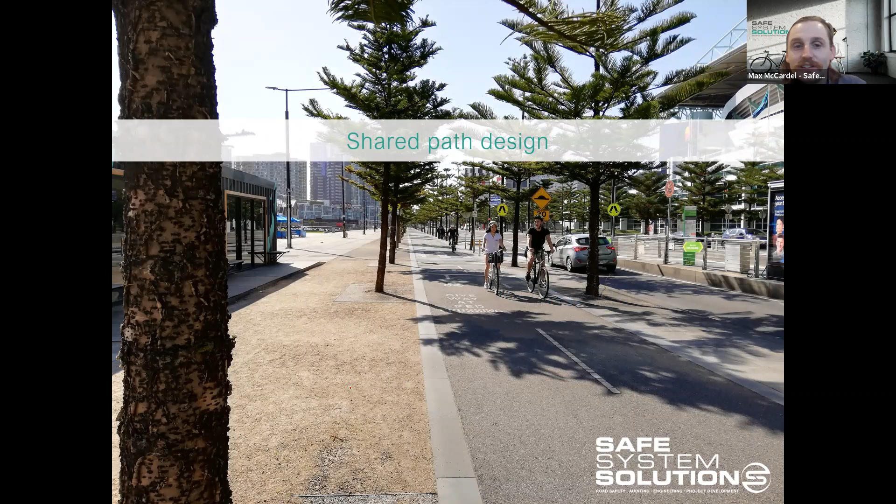I'll get stuck straight into it. We actually have this off-road facility here that runs along an esplanade, and it's a little bit difficult to see, but this is exclusively for cyclists.

Pedestrians walk closer to the esplanade, shifted away, and bikes are given sole priority within this space. This is a really good example for high volumes of either pedestrians or cyclists, because bringing both users into the same space at high volumes risks cyclists weaving in and out, creating uncomfortable tension between path users, and increasing the risk of collisions with other cyclists or path users. So with significant volumes of both peds and cyclists, it's good practice to separate those two and build separate facilities.

In a perfect world that's exactly how this environment would work, but generally pedestrians will pause and wait on the bicycle path, and similarly cyclists might want to ride along the esplanade. So it's not perfectly constraining those two users to use those facilities, but the intention is to get higher moving cyclists using this part of the network, and pedestrians who like to meander over there.

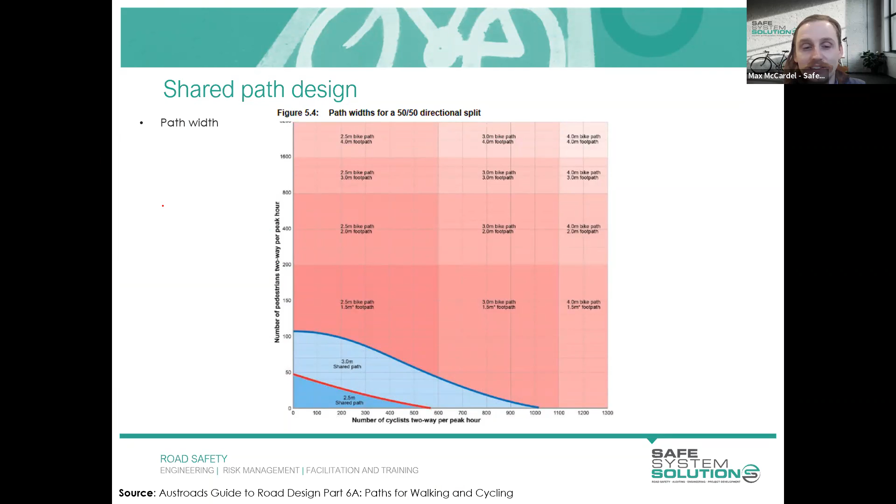This works into this graph here. For those who may have seen this, it's from the Austroads Guide to Road Design, Part 6A, Paths for Walking and Cycling. You'll notice that source comes up frequently throughout the slides, just in case you want to reference it yourself - it's a quick link to find exactly where this graph has come from.

What this is saying, if we look along the x-axis, is the number of cyclists two-way per peak hour - a very long way of saying how many cyclists you have within this area. Similarly, the y-axis is how many pedestrians you have within the area.

The main takeaway from this figure is, as we increase both in the X and the Y into this category in the top right corner, you'll see it's actually recommending a 4-meter bike path and a 4-meter footpath. So with really high volumes of both users, it's suggesting a 4-meter wide bike path and a 4-meter wide footpath - not a shared path, because the numbers are just too high.

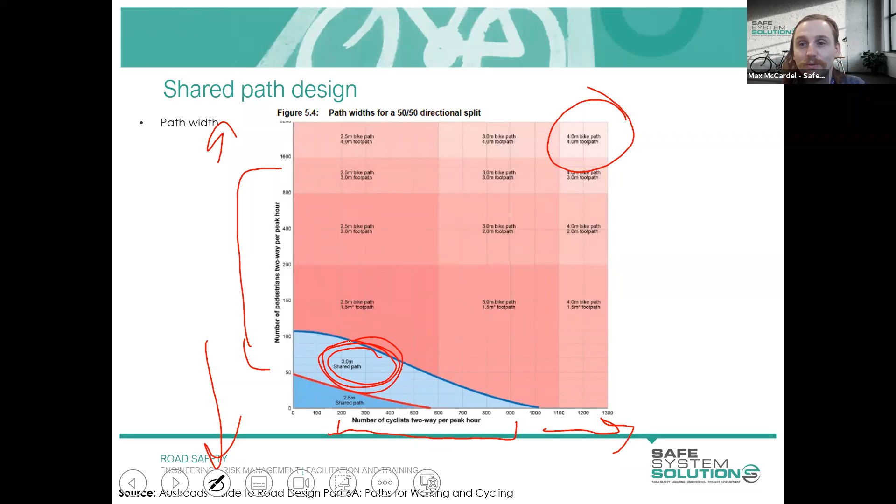Regularly, however, we are working within this 3-meter shared path cross section. A 3-meter shared path is incredibly common and typically what's designed for. But if you're working within CBD environments or high cycling corridor use environments - strategic cycling corridors - you may benefit from thinking about separating cyclists and pedestrians instead of providing a shared path.

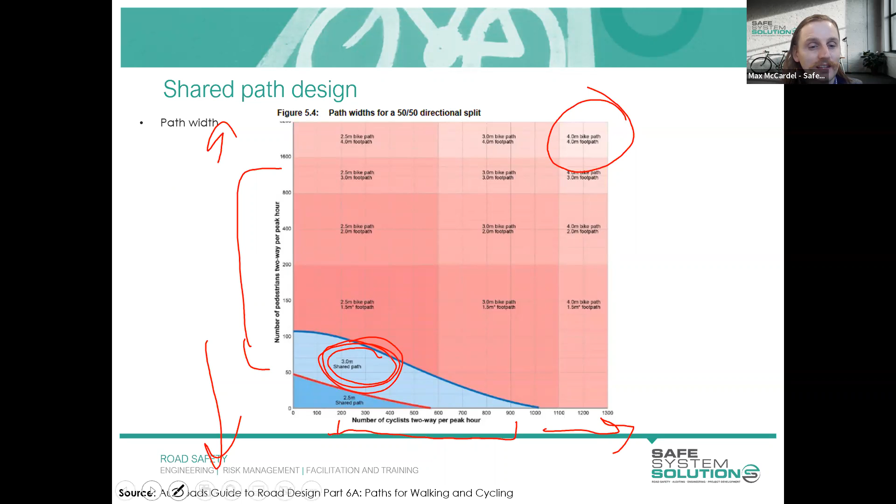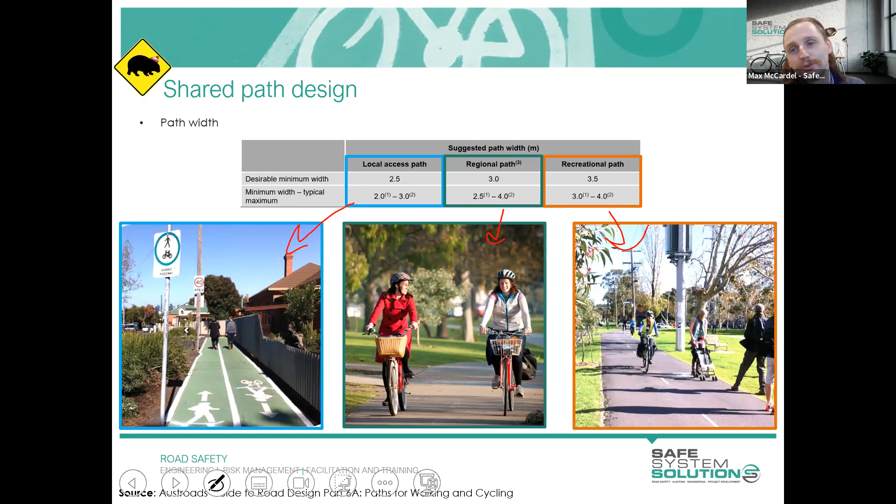Another means which helps define the cross-sectional width of our paths is also provided within the Austroads Guide to Road Design Part 6A. It gives very brief descriptions of different types of paths: a local access path, a regional path, a recreational path. There are brief descriptions like in the glossary of the Austroads guide, but it's fairly open to interpretation - there aren't metrics which would clearly define what constitutes local access, regional, or recreational, so there's a little bit of cloudiness on exactly how you'd apply this.

All I'd say is if we look at the local access path on the left here, this roughly 2 meter wide path is basically a footpath. It's not really wide enough to cater for cyclists in either direction - as you can see, two people walking side by side leave nowhere for a cyclist to safely pass; they'd best have to wait until it goes to single file. So generally we don't like to head towards the lowest of those minimum widths - we like to start at the upper boundary and work towards providing a project that can fit that.

Ken: Some good chat coming in already, just around clarifying what will be covered. The question, though, related to this one you're just talking about: does a less than 3 meter wide shared path increase the risk of a head-on collision?

Yes, I would suggest it would. As soon as you start narrowing things, particularly if there are sightline issues, you're increasing the risk of a path user straying into the other lane and potentially colliding with others. Also associated with that is the runoff path crash risk, so that shouldn't be forgotten either.

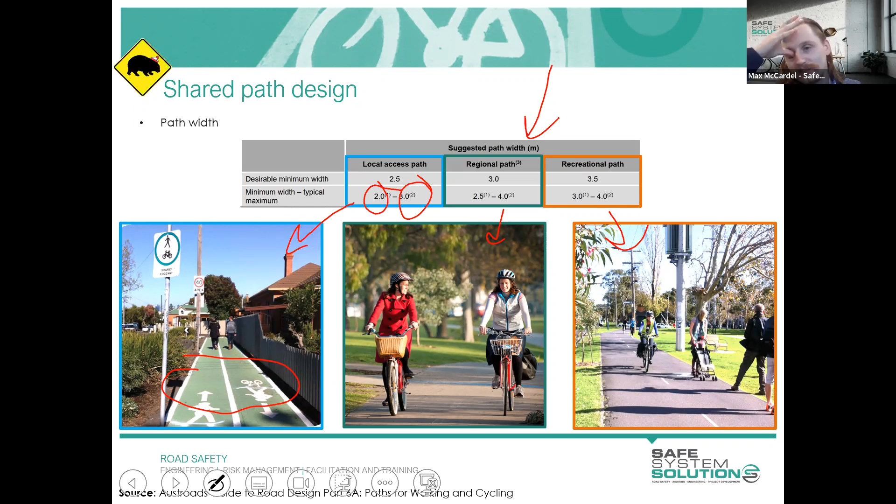So the next category is the regional path, broadly characterized by medium to higher speeds. It will have some degree of commuter cyclists, but not necessarily only used for that purpose. Recreational paths, on the other hand, are expected to have adjacent land use like parkland or playgrounds, indicating high levels of extreme or vulnerable road users, the very young and the very old, people with prams and similar situations. These categories are quite broadly defined, there's no classification network showing exactly what each type looks like.

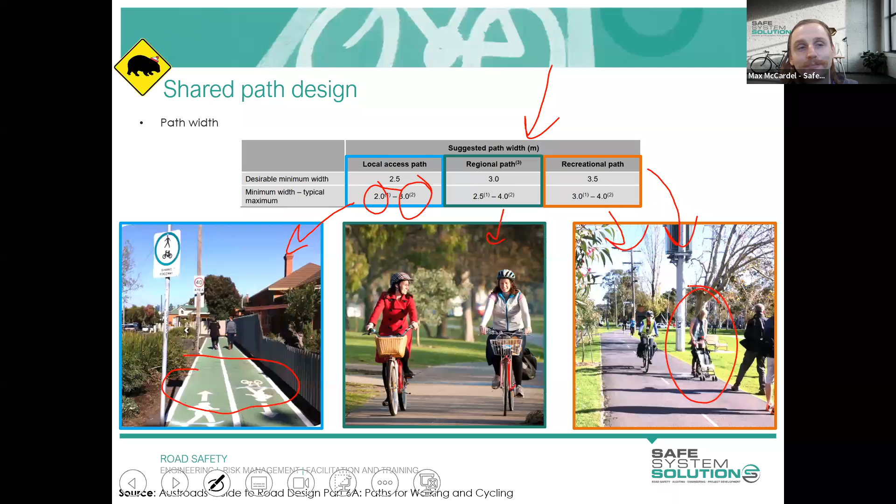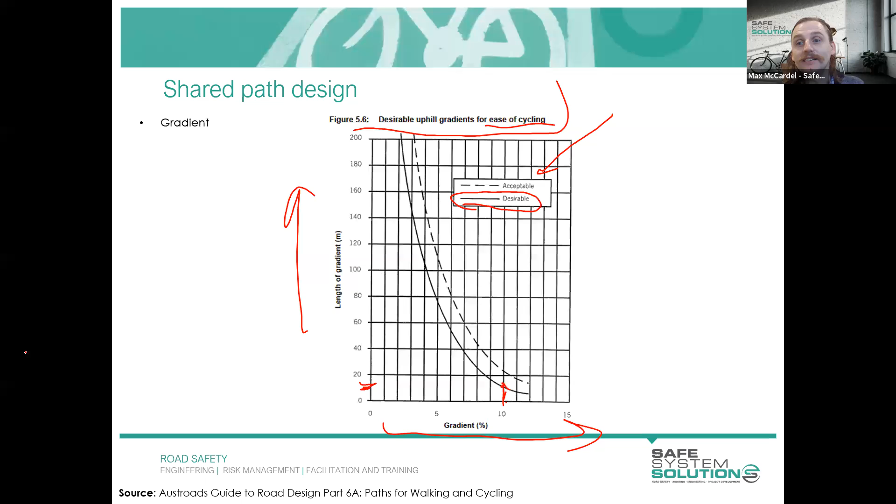Just want to look at what this figure is saying and its importance. Along the x-axis we have our gradient, the higher the gradient, the steeper the hill or incline. Along the y-axis is our length of gradient. Looking at a 10% gradient, which is very steep, even as a pedestrian walking you'd notice it. For a desirable outcome for cyclists, or ease of cycling, you should keep that to a maximum of 10 meters. In other words, if it's really steep, it should be for a really short amount of time or space. There's also a caveat of an acceptable range, like an extended design domain for those in the technical realm. Don't worry too much if you're not in the design space, it's just about making it easy for cyclists to feel like they're in an environment that suits their abilities.

Ken, a couple of quick ones. One was on the line marking.

When do you apply line marking for different path widths? Is it a bit like a road where there's sort of minimum widths and you hit certain line marking? Do you know that? Yeah, it's a really good question.

Thank you, Sam. It's done differently in every jurisdiction. There's no statewide or national guidance which would suggest at this width it should look like this or like this. Even along the same shared path, you may have discrepancies in the way the line marking is applied. So unfortunately, at this point in time, there's not one consistent treatment.

And just for those curious what this is talking about, on the shared path, sometimes it's just the edge line that's been applied, and that's about it. Other times you actually get the dividing strip to separate the two traffic streams, similar to a carriageway. But there's no metrics or anything out there that would suggest this is exactly when you should be applying one or the other.

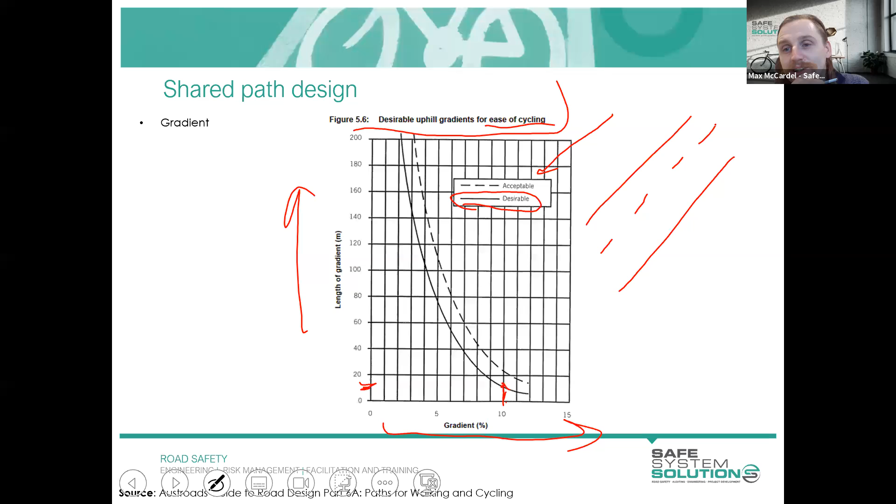Other times it's just the bicycle symbol and the pedestrian symbol, and that's it. But I'd be interested if anybody in the group has a preferred way of doing that, or their preferred guidance - share that with everybody. And Michael's asking for a photo of a 10% gradient path, which I don't think you've got one.

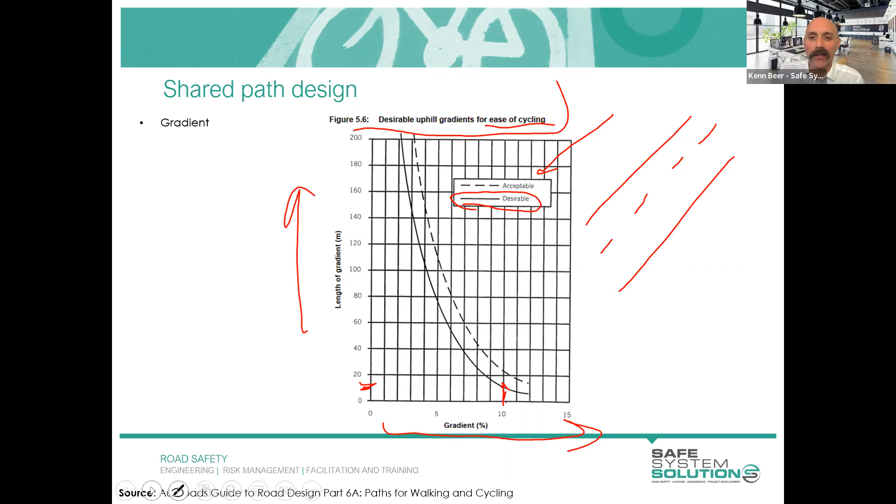Let's have a look at the next slide. Oh yeah, this one is quite steep. I couldn't quite confirm, but this is for a pedestrian overpass that crosses over a highway here - and I should say pedestrian and cyclist overpass, because it's a shared path connection.

And before I spoke about the gradient uphill, I'd like to throw out a question to the group. Are there any issues with gradients downhill for cyclists? So imagine you're the cyclist, you've got your bike here and you're heading down in this direction here. Can anyone think of anything within this particular scenario that could be of concern, or perhaps a risk that you might note if you were auditing this design?

Okay good, let's see if people want to type a few concerns that they might have. And while people pop those in, Michael's asked why the two parallel running handrails - is that an attempt at a bicycle friendly sort of system there? I would suggest, yeah.

So it looks like one of these rails would be just typical for pedestrians - it's at a little bit of a lower height, so something for them to grab onto. And the higher rail is something we refer to as cycle-friendly fencing, which we have a slide later on in this presentation to cover. But I'd suggest that's the reason they've got these two different rails. Not a common feature though - I can't say I see that regularly.

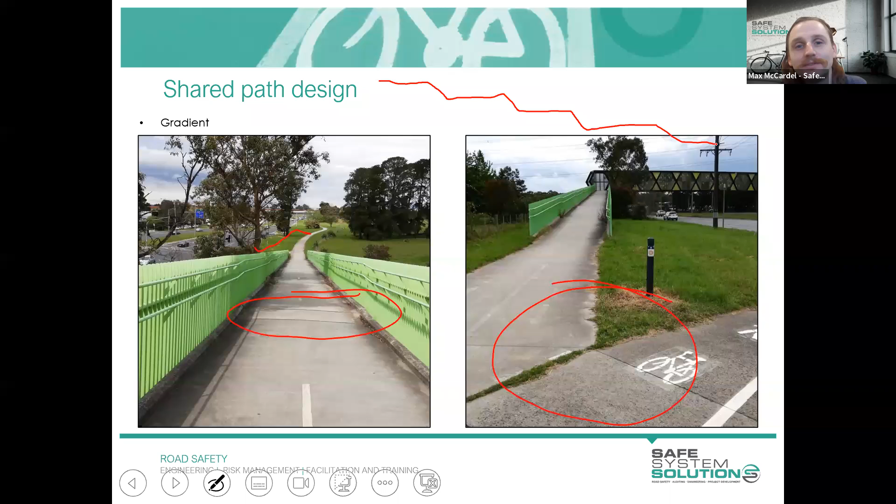My understanding, and happy to be corrected, is how this would look in plan view - it's not a very good drawing, I'll try that one again. Sorry about that. You'd have a section that goes downhill, then a flat section, then a section that goes downhill, flat section, downhill, and it continues in this fashion all the way along.

My understanding is that's for people in wheelchairs, to give them spaces within those landing sections to pause, both going uphill and downhill, so they don't collect too much speed going downhill and potentially lose control. As far as I'm aware, this is actually a common design feature in these pedestrian overpasses.

Toby has a copy of AS 1428 next to his bed and reads it every night, and he's putting in some wonderful information that ramp landings are required at certain intervals, and also that double handrails can be a requirement for access for people with disabilities.

Question around this site and why we're looking at it - is it a particular crash site or a particular site of risk, or is it just an example of where we like the thinking of potential risks and not waiting for crashes to happen before reacting?

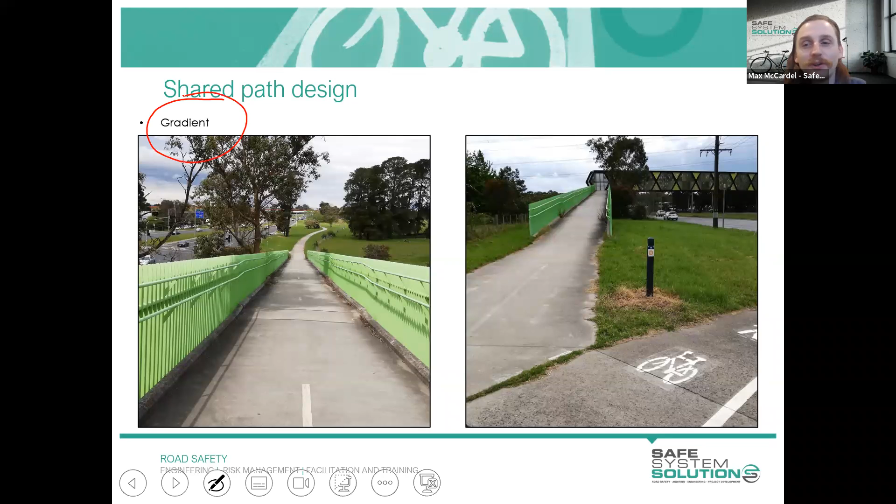Yes, most likely the latter is the reason for this inclusion. Also, the Austroads guide focuses on the uphill gradient - that's where you get your figure from, that's generally what the designs are catered for. They're worried about cyclists going uphill.

The purpose of this slide is, well, cyclists are also likely traveling in the opposite direction. What's at the bottom of that downhill? Are there hazards there? Are there path interactions? Thinking about those things as well, it's trying to expand on what's written in the Austroads guide.

There's a bit of discussion around whether those ramp landing points could be a hazard for a rider as they come down. You can feel it as a cyclist, but I wouldn't suggest it's as big a risk as a hazard - they're generally designed in a manner that reduces any instability issues. It's a good question though.

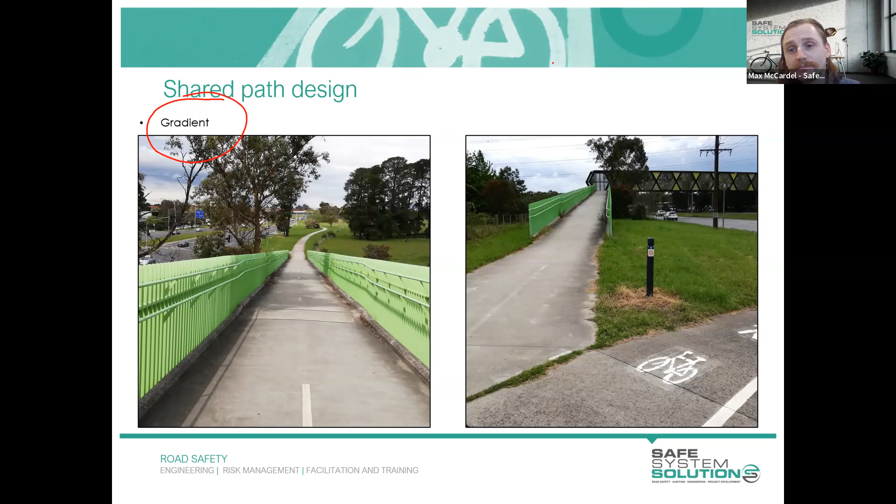Yeah, let's keep ticking along. So let's have a look at what our operating width or cyclist envelope is. Similar to general traffic and heavy vehicles who have an envelope, cyclists also have an envelope. The operating width of a bicycle and rider is generally taken as 1 meter.

There's a little caveat in that if cyclists are going uphill, they kind of go left and right to gain momentum, which would bring that operating width a little wider. Austroads is actually talking about increasing that to 1.5 meters, which could have a follow-on effect to other things within the design world. But at the moment it's taken as 1 meter, so we'll have to watch this space to see things change.

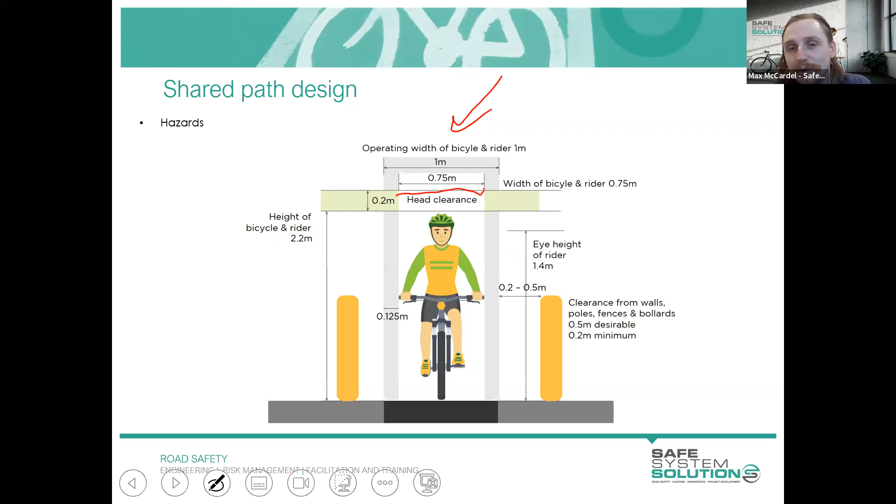What that's actually saying is the actual width of the handlebars of a typical bicycle is 750 mil, 0.75 meters, which means there's only 125 mil clearance from the bicycle to the end of that operating width - so there's not a lot of clearance there.

The most important aspect here is what we consider an appropriate offset from hazards for that operating width. 0.5 meter is the desirable, generally taken as the constant offset from where the shared path would end. There's a 0.2 minimum, but that would only apply if it's a smooth feature, like cycle-friendly fencing, which is okay to be within such a tight space of a cyclist because it's less of a hazard compared to snagging risks or a utility pole. The final point is the height of the bicycle and rider is about 2.2 meters and requires a head clearance of 0.2 meters.

So anyone doing any work within underpasses, or cyclists using culverts as a means to connect shared paths, that head clearance will certainly become very relevant to you.

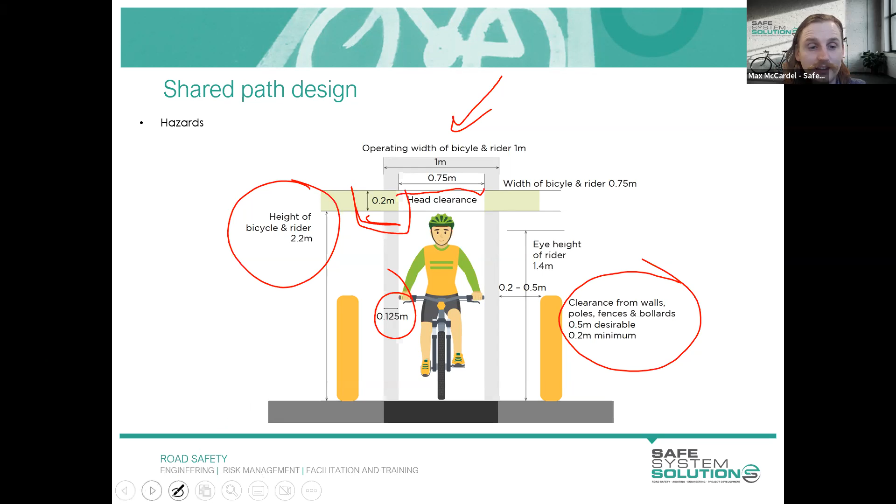Just another quick one around passing and overtaking clearances needed for other path users on a shared path. So thinking about what sort of spaces we might need for that.

I haven't seen any guidance that would particularly stipulate when to provide overtaking opportunities. To me, where it's useful to widen paths to allow for that is where you've got shared path connections. Similar to what you'd do at a rural intersection, say a T intersection, you might provide that little bit of extra width or build out the shoulder, so if a right-turning vehicle enters the minor leg, someone else can overpass them on the left and carry on. Similar design philosophy within the shared path space, but that's not written in guidance - it's more just a philosophy that's evolved over the years.

There's quite a bit of road design guidance theory, but those theories haven't yet translated to people making firm decisions around shared path design guidance and things like overtaking opportunities, overtaking lanes, and clearances required for that and the like.

Another question that's come in - there are many types of bicycles out there, so how do we get into this particular design guide bike? It's a very valid question. We're moving in a space where e-bikes are becoming more prominent - recumbent bicycles, tricycles, unicycles, lots of different ways to get around. This is just a means of identifying what a typical cyclist would look like in terms of geometries, similar to how we have a standardized car or standardized heavy vehicle. It's not a perfect illustration that's going to cater for all different types of cyclists, but it's trying to take a snapshot of what the average would look like.

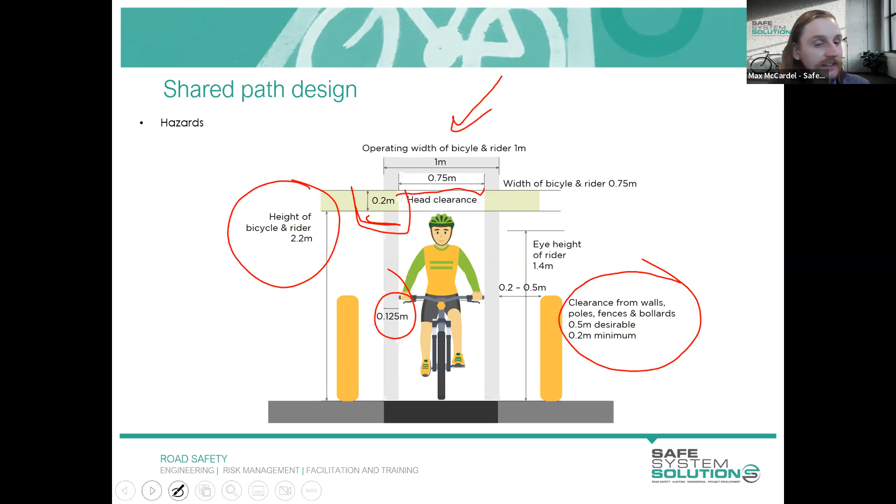I might carry on there, because there's still a few slides to get through. We've got some hazards here, very common hazards that are seen adjacent to shared paths, or in this case, within a shared path.

These kind of design features may look trivial or not seem like a big issue when you're looking at a design, but just having that sense check or audit completed by someone who is a cyclist or uses cycling facilities, or is experienced in this space, can help rectify these issues before they get built - like having a little bin shelter that's actually off the shared path as opposed to being constructed on it.

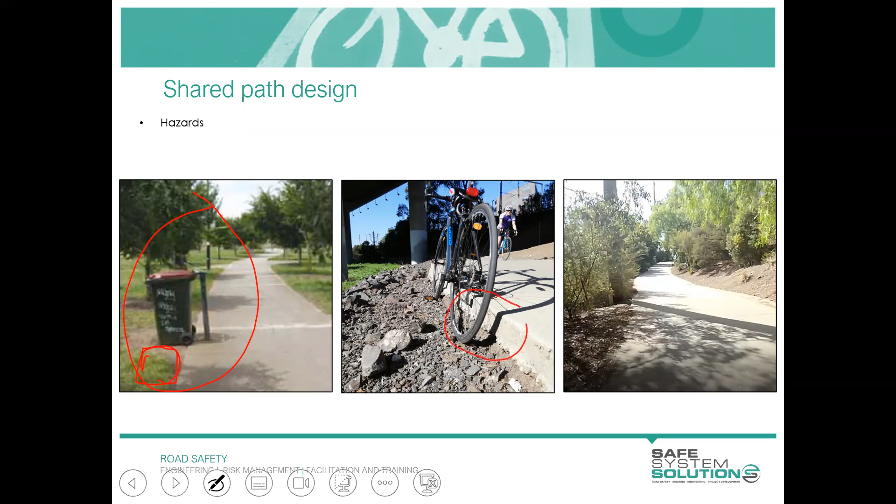This is an example of a concrete path that hasn't been backfilled and battered - the slope hasn't been battered. Likely this has to do with just the construction of this particular path. The solution is just building up all this rock backfill material and creating a nice smooth transition. If you were to come off your bike at this location, unless you had a mountain bike, you'd be very unlikely to get back onto the shared path.

Final little hazard here, it's just a utility pole that's very well hidden by the vegetation that's overgrown it, and the edge of the shared path is about here. So it hasn't met that 1/2 meter clearance I was talking about before. Basically, if you were riding along in this direction, it'd be possible for a handlebar to snag on that utility pole.

And it becomes more of a risk when you have lots of activity occurring on this side, or maybe there's a person walking a dog and the dog decides to walk along here, so you're forced to swerve and then you're colliding with the utility pole.

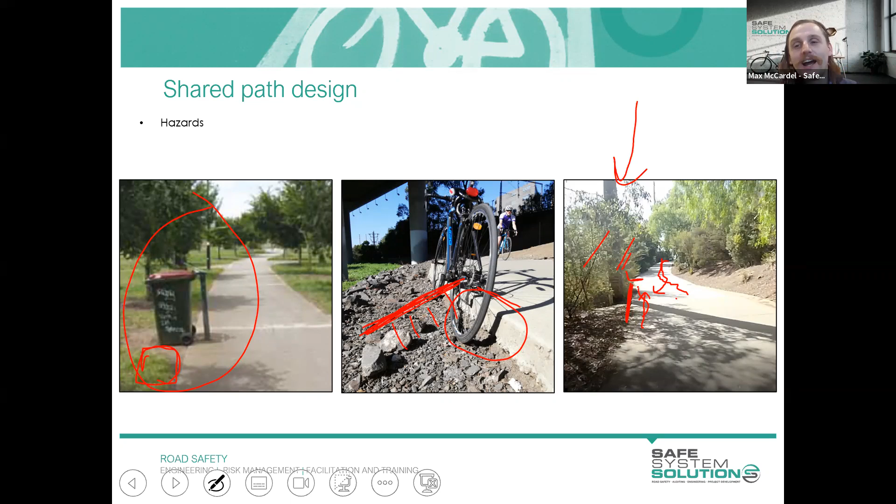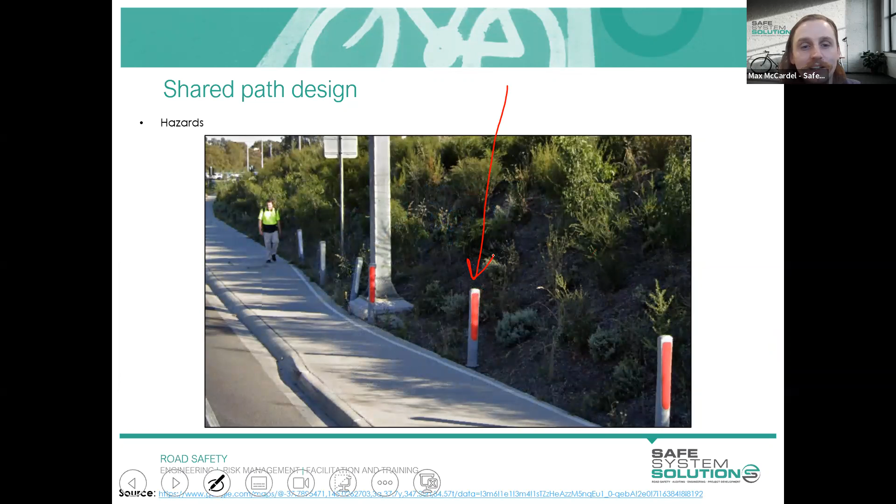So considering all these different hazards, what could be done within these situations to improve safety. An example of that final hazard, and what's been done in this particular environment, is installing these kind of paddles or flexible bollards, as they're called, just showing that the path narrows at this location due to this gantry foundation.

For those that haven't heard of a gantry, this is just like a base for a large sign that is shooting over the carriageway there.

So yeah, what they've done - I would suggest this is a post-construction audit - is noted that the shared path narrows, and providing these paddles here just to make it more conspicuous that there is a hazard in this area. This is a relatively recent job, I'd say 3-4 years old, maybe.

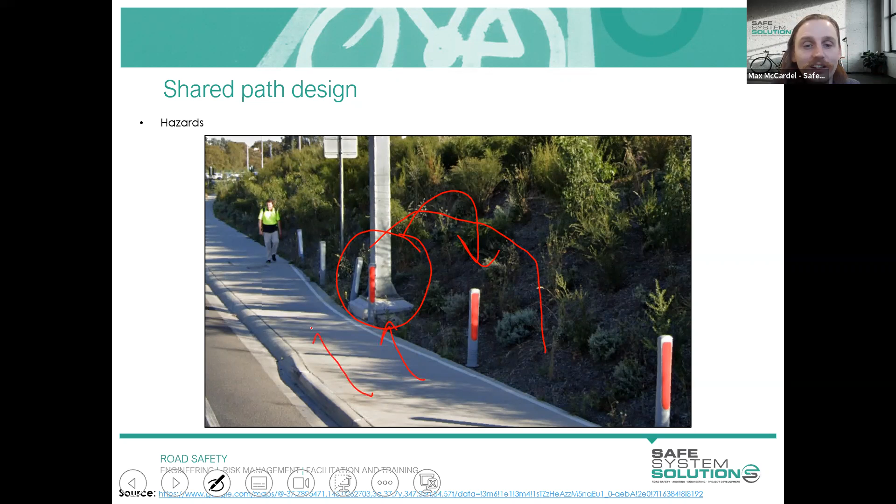So it is surprising that, in the design stage, the decision wasn't made just to shift this hazard outside of the shared path. You could build a retaining wall to get rid of all that material as well. Much easier to design out these issues rather than get to construction and make these slight improvements to the safety, but there still is a risk of colliding with the hazard, or colliding with other path users at that location as well, where it narrows. So much easier to try and rectify these things during design.

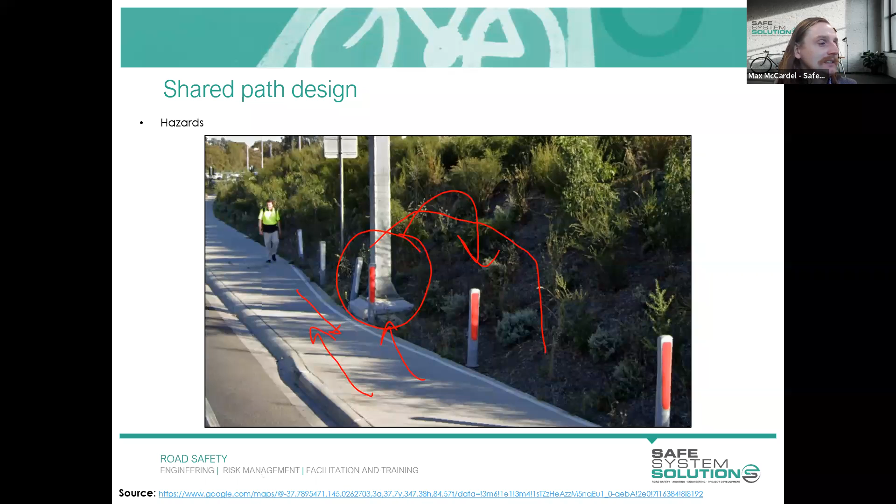Ken? Well, that links with another comment that came in around the difference in eye height for different riders, and whether we should be designing particularly for kids or that 1.4, which is the typical eye height, and how you might factor that in or the like.

Yeah, so you could certainly run this calculation a couple of times, just spit out some different results depending on the expected users within that environment. So it's certainly a consideration you can do. Generally, it's taken as an average, just like the cyclist envelope is taken as an average as well. But there's nothing against saying that you don't run those design scenarios and consider how different users within that area would experience that facility.

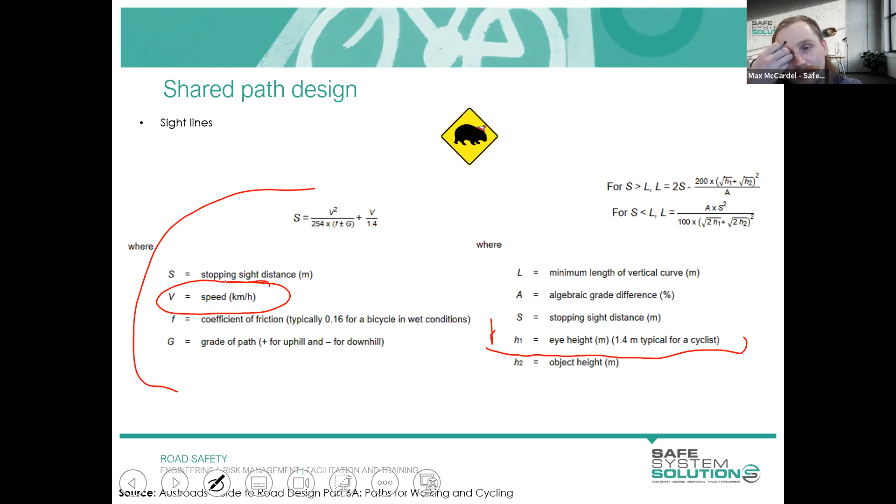Also, what's the actual general makeup - is it recreational cyclists, is it commuters getting to work? All these types of things you try to factor in, but generally kind of 20 to 30 kilometers per hour, I would suggest, is a bit of a benchmark within shared path spaces.

The TMR shared path crossing guidelines have some figures in there, as do the Victorian Department of Transport supplements. There's stuff in Austroads, so you can gather different info. 20 for a shared path, 30 for a dedicated cycleway is your general rule of thumb, and then you're going to adjust that based on uphills, downhills, curves, and different speed management techniques.

Toby also makes a wonderful point around some differences in the 2.2 meters, 1.4 eye height, and then we know we've got kids in there, so some sort of range would be a good approach to go for if you can.

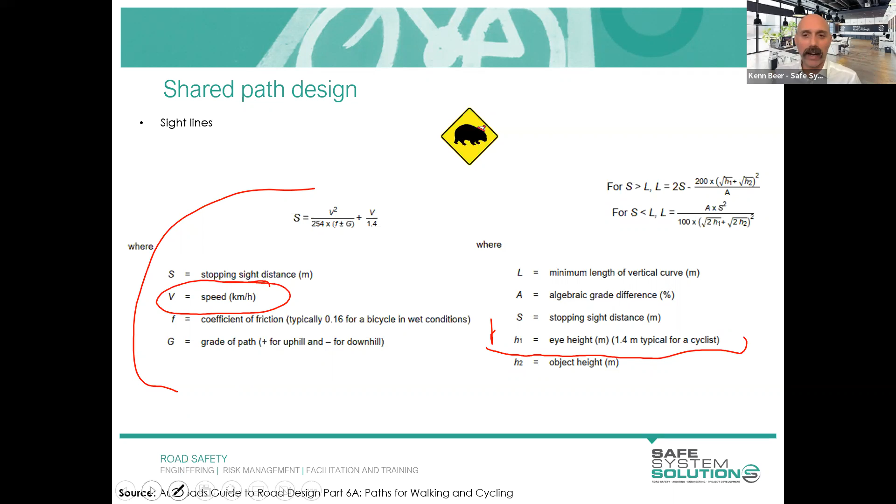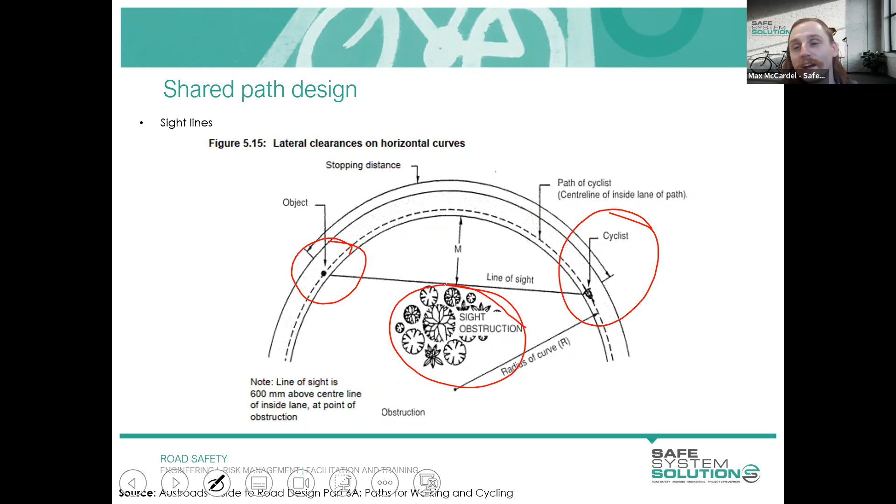But because of that obstruction, it makes it very difficult. You would already be slowing down as a cyclist, but are you able to safely stop prior to colliding with a hazard that is around that bend? So that's the purpose of that calculation.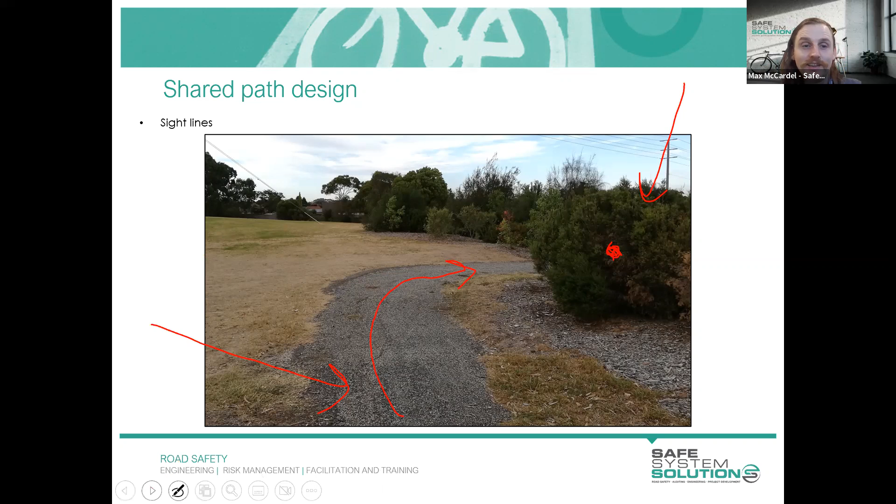As I alluded to before, cycling safe fencing and fencing requirements in general. There is a little bit of guidance on when to apply fencing.

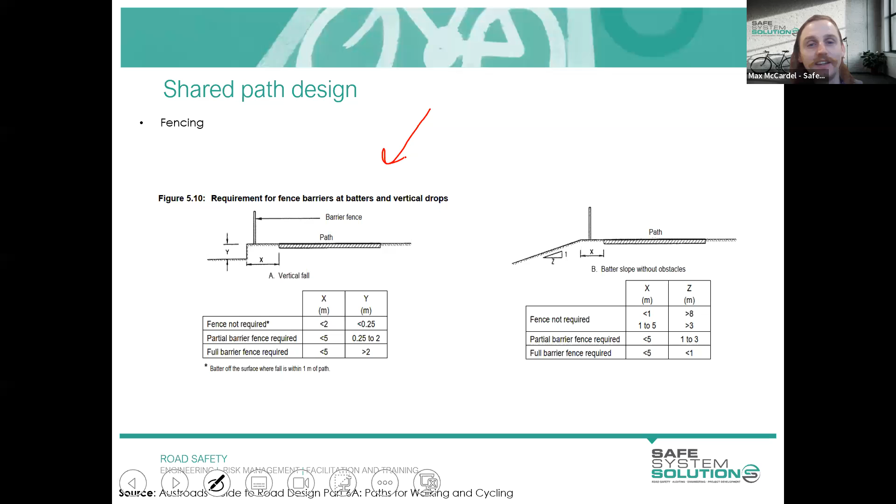We'll look first on the left-hand side here. This is regarding if there's a large drop-off, think of a cliff face or something like that. Y is the height of the drop-off, and X is the distance from the edge of the path to that drop-off. What the table tells us is if X is less than 2 meters, so the hazard's less than 2 meters away, and Y is less than 250 mil, a fence isn't required, with a little asterisk, because instead you batter off the surface. So instead of putting a fence there, just as I drew previously, try to grab some loose fill and batter it instead, using natural earth to create a slope rather than a sheer vertical face.

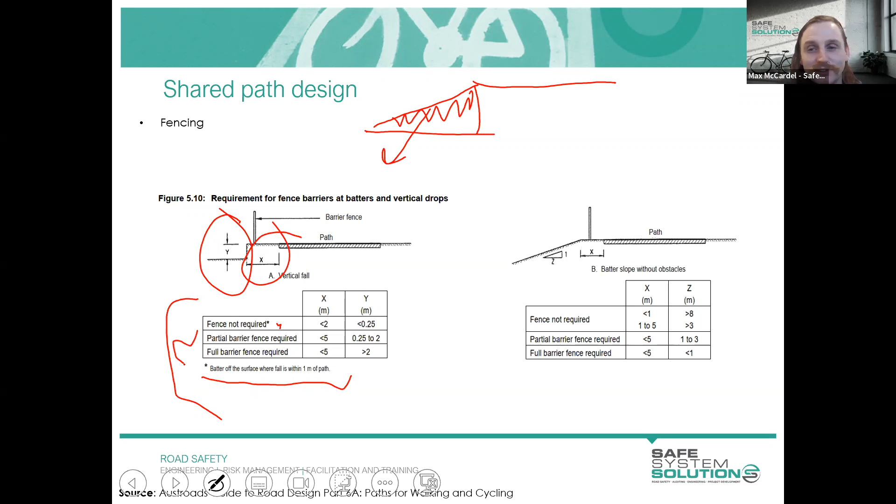I won't go into all the details on when to apply the different types of fencing, but there are two different categories: partial barrier fence and full barrier fence. I've got a slide that will show you what those two descriptions actually mean.

The other criteria that would warrant a fence is if the adjacent slope is too steep. Think of when you're in a cutting or something like that, with something incredibly steep adjacent to it. Once again, X shows the distance from the edge of the path to that hazard, being the slope. And Z is for those that do rise-over-run type calculations, referring to the horizontal distance, with 1 being the vertical. So the lower the number, the more of an incline it is. Basically, it's all to do with the steepness of it.

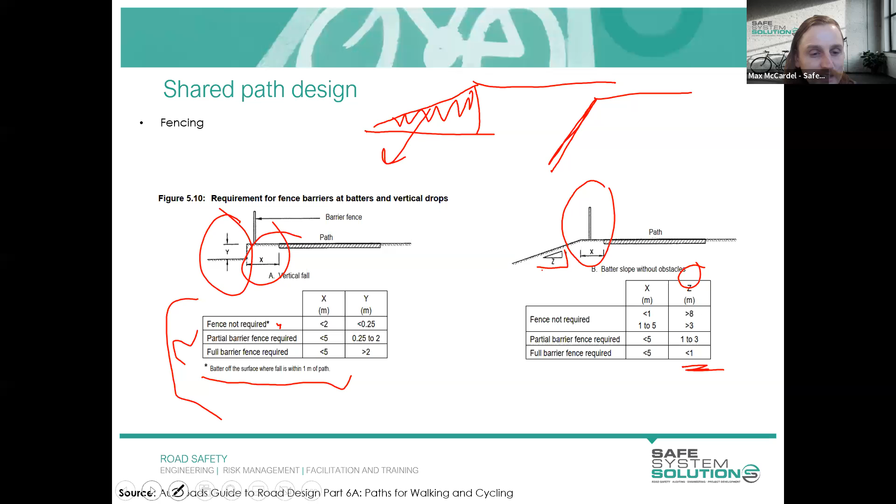For those interested in this technical advice, we thought we'd provide it here. But in terms of practicality, what we're saying is if we've got a significant drop-off, like in this case here, a partial barrier fence has been provided. What that means is you've got these rails here, which would stop or contain a cyclist, hopefully. There is still the risk of...

...perhaps smaller children tumbling through those kinds of gaps, those little windows there. That's why it's called a partial fence. And a full containment is where you've got vertical members that stretch the whole way along, so there's no way of getting through that. It's just not a wide enough gap to fit any limbs or people. So that's the full barrier. It's kind of a little bit bizarre why you wouldn't just have one type of treatment, but that's what they've stipulated in the Austroads guides, and it's in Australian standards as well.

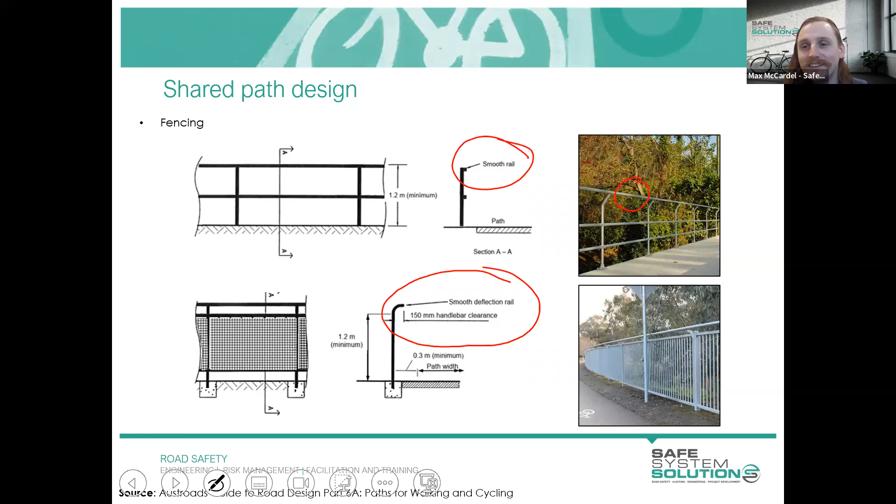The most critical feature, though, as I've touched on a few times, is the cycle-friendly fencing. That's a feature designated by this smooth deflection rail. Basically, this rail is situated about 1.2 meters above ground level, which roughly works out to, if you were on your bicycle, just slightly above your wrist height. So if you were cycling and collided with one of these cycle-friendly fences, instead of your handlebar hitting that feature, your arm from your wrist up to your shoulder would instead collide with it. So rather than a sharp, snagging outcome—if that rail was a little bit lower or had vertical members or anything like that—you've got one smooth deflection rail, one smooth member there, which would collect you at arm level and hopefully guide you along that rail, increasing your chance of staying on your bike. So there's definitely a reason and some good thinking behind creating the rail at that particular height with that one smooth feature, to keep cyclists on their bike if they do happen to hit these.

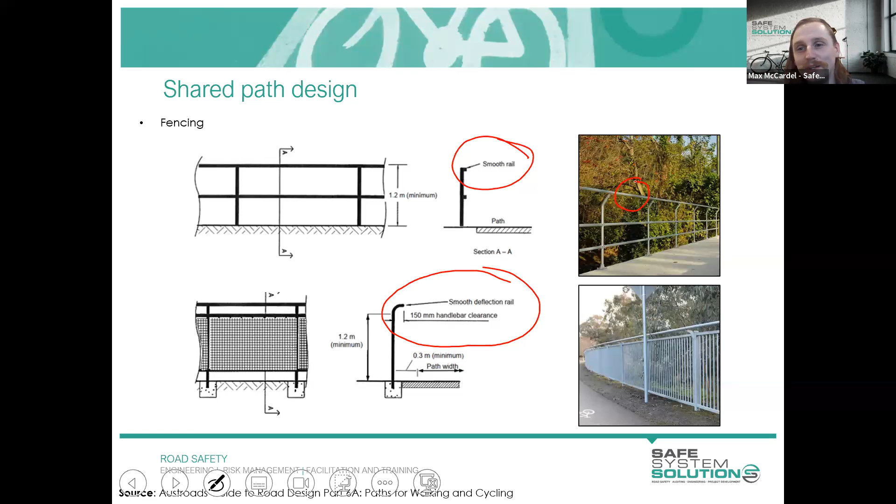You'd be blown away by the number of times shared paths, with all this cycling infrastructure and cycling volumes, don't include this smooth deflection rail. It could just be a chain mesh fence, or the old pool mesh fencing and things like that. But that smooth deflection rail, referred to as cycle-friendly fencing, is really, really important.

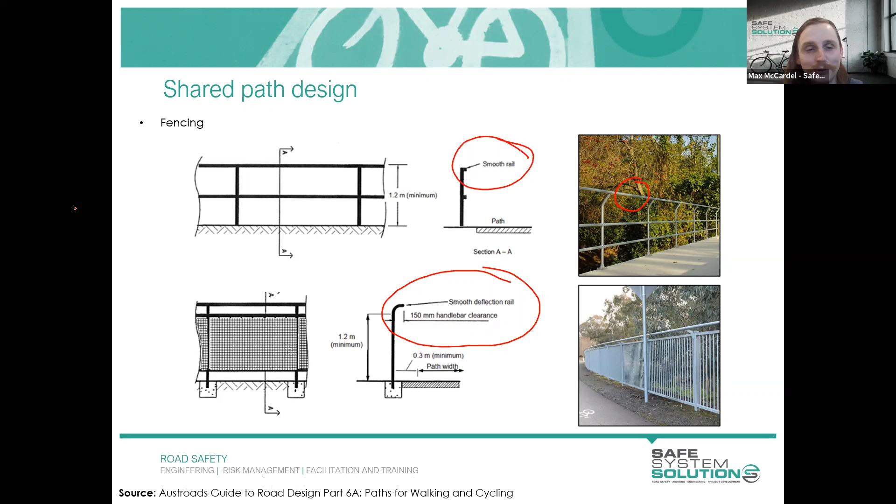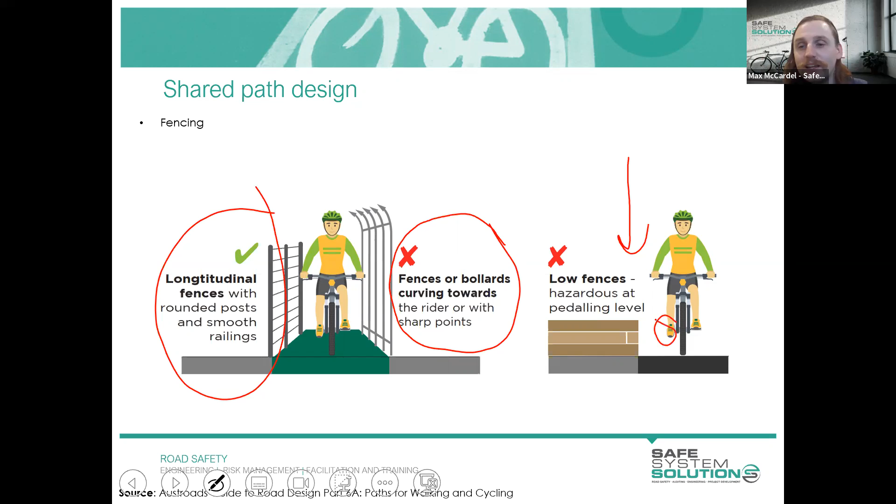All right, I'll keep flicking through. Just another graphical illustration of the fencing requirements. So longitudinal fences with rounded posts, smooth rails. We don't want to see any curving towards the user. And we also don't want to consider any low fences as well. So things like planter boxes, they look beautiful, but they can actually be a pedalling risk. Your foot could snag on that and create a hazard as well.

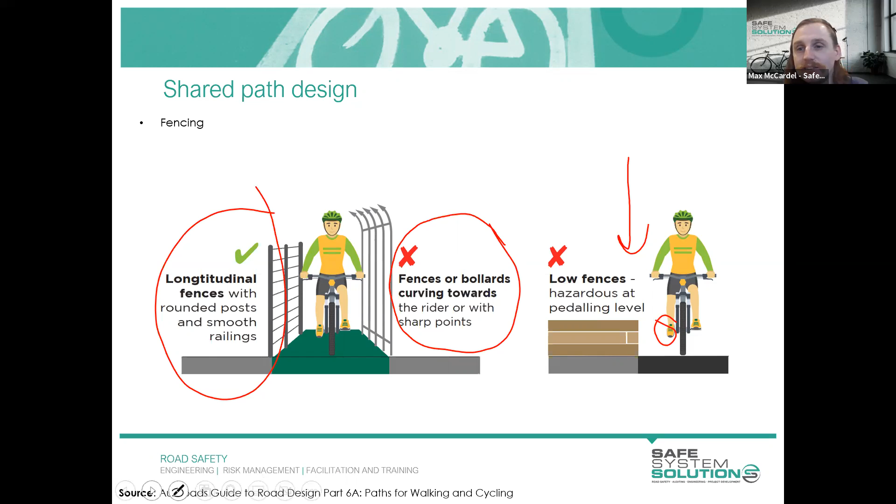Kenn, I was just sharing that Michael's put in a link to the really wonderful TMR guidance document around fencing, with some good visual examples of risks and a risk assessment tool. So thanks for sharing that, Michael. Maybe we'll give out a prize there to Michael. Sharing the info, love sharing is caring.

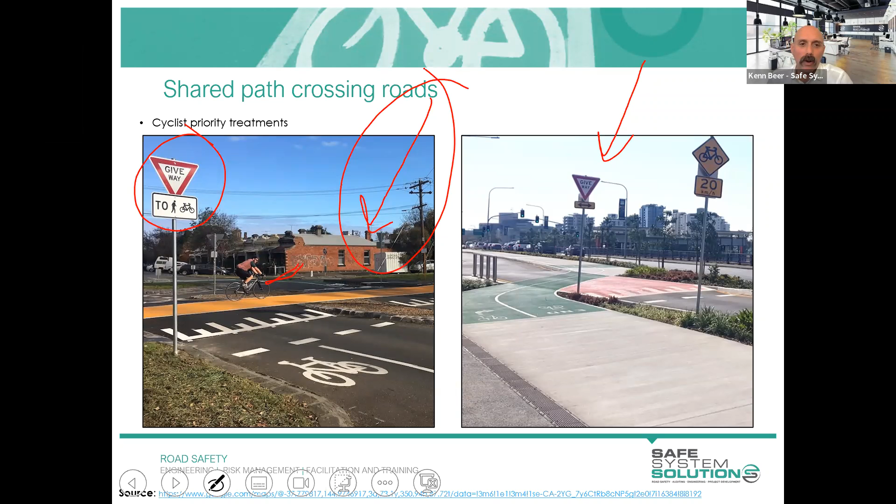And then, should there be painted zebra crossings at these locations? I suppose, just to answer that one quickly, that they're shared path crossings, so the pedestrians have priority within that. It's a specific way of doing it. Usually they're orange, yellow, and the green is more done usually just for cycleways. So probably the right one is just a cycleway, is it?

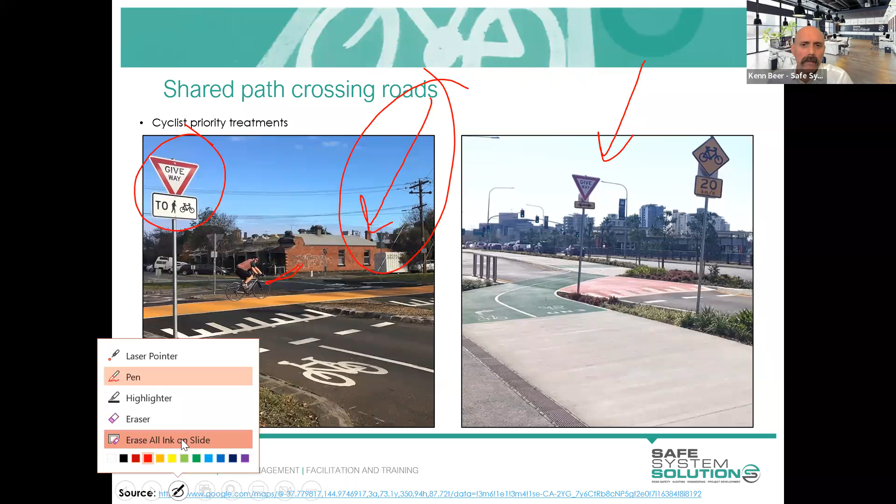It's not a shared path. As I understand, yeah, the footpath's over this side. Okay, so we're seeing the 90-degree angle of approach, so sightlines would be better, obviously the cyclist not having to look over their shoulder and the like.

Left one highlights vulnerable road users, more difficult to see cyclists turning their head to approaching vehicles, and yes, at the Gabba.

Bang on. So I like the sightlines, 90-degree angle. Did I hear that one there, Kenn? Yep, so I think Johan was first at that one. So prize there, got to be quick. Ilse was shortly followed behind. So that's certainly what I had in mind with this one.

If we have a look at the left-hand example, you can see this cyclist's line of sight. If they were leading up to this intersection, fairly easy for them to see vehicles as they approach and stop, and hopefully give way. But if they don't, they've at least made that eye contact and can undertake any emergency maneuvers as required. Because of that perpendicular crossing, it's much easier for those two different traffic streams to look at each other, so those sightlines are improved.

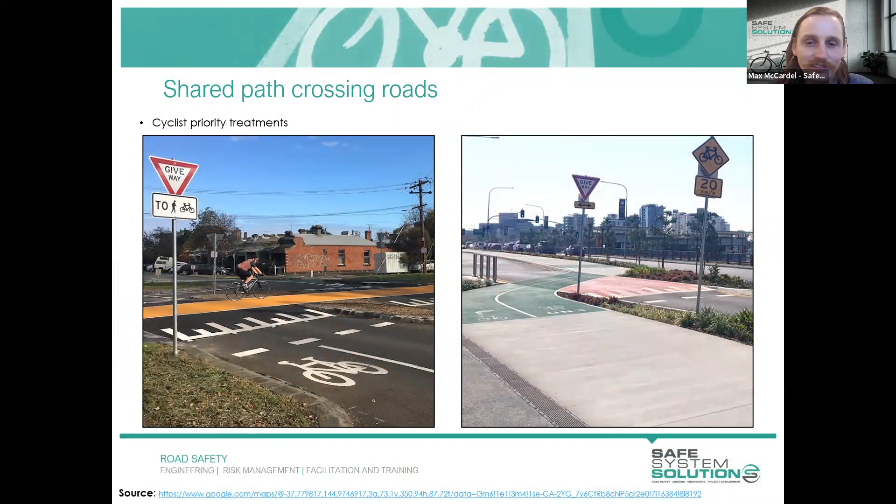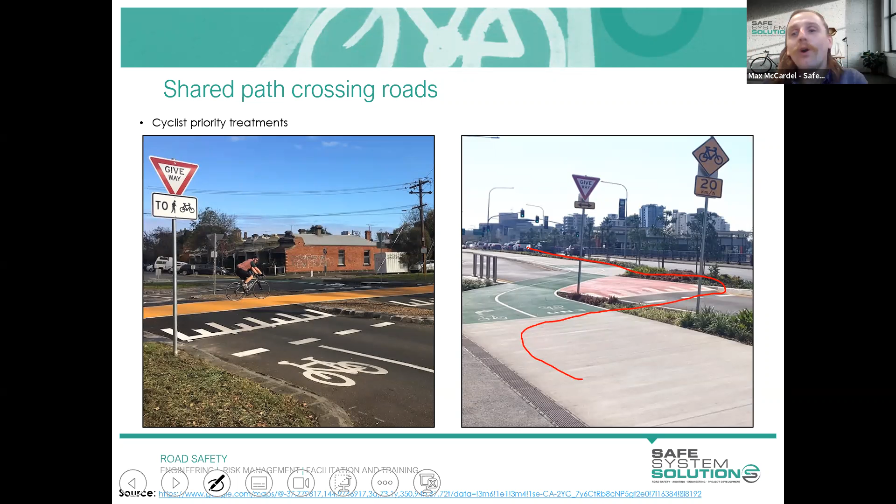If we did have this perpendicular, there's also the connectivity issue in that a cyclist would then have to really slow down, and it's not as attractive a facility if you're managing that tight radius curve to cross perpendicular and then perpendicular again. That would really slow down your journey if you just want to get from A to B as fast as possible. So there's a whole realm of things to consider at these locations, but I'm glad that everyone seemed to pick up on those things.

Where we do have shared paths crossing roads - sorry Kenn, did you want to jump in? There's just a bit more continuing discussion about the signage arrangements at that site. Toby's had a look at the street view and there's lots of sign clutter. Let's keep moving on Max, a bit more to cover.

So where we do have shared paths crossing roads, it's very common to see these features, bollards. There's a lot to talk about here, but with bollards there's kind of two tiers you want to consider. The first and most imperative is: is this actually required? Because there are so many bollards on the bicycle network where it's just not feasible for general traffic to access these spaces.

Perhaps they were put there once upon a time because of worries about maintenance vehicles accessing certain parts of the bicycle path. I strongly suggest you're better off having a conversation with maintenance crews and defining where they can drive, rather than getting them to drive along the bike path and just installing these hazards, because that's what they are - hazards for cyclists at every single location. That's my one little bugbear.

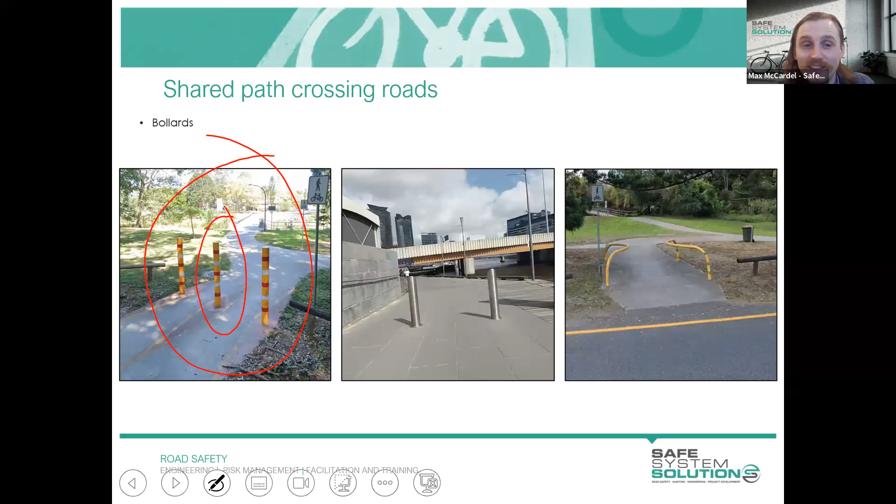If you do have to install them, it's really important that they are as conspicuous as possible, so they're incredibly easy to see. This one here, the yellow one, has these reflective tapes - that's a pretty good example. But this one in the middle could easily be hidden if you were following another cyclist, who would obstruct your view of that middle bollard. They can see there's a middle bollard and adjust their path accordingly, but if you were right behind them, you may not see it until the last minute, which becomes an issue.

The color of bollards is important too. This is a stainless steel bollard applied within a bluestone background, so it blends in perfectly - which is not a good example of installing these bollards.

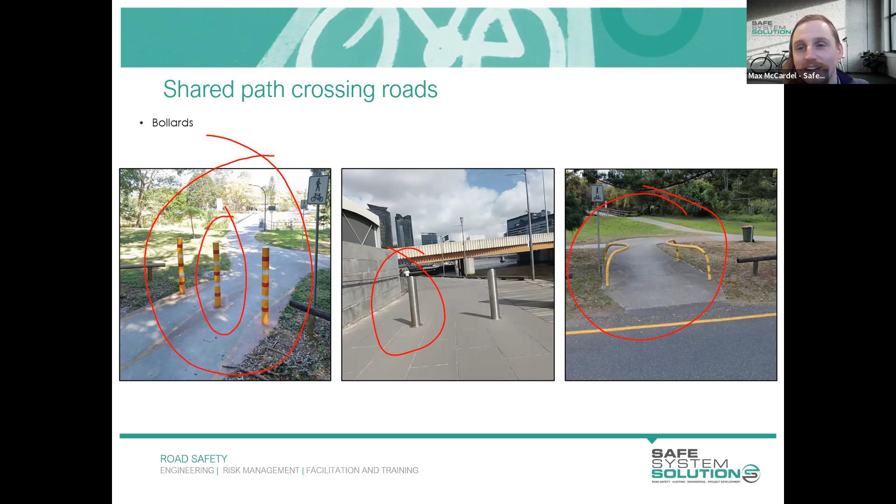These ones here in Brisbane - once again, not trying to pick on Brisbane - are called banana bars, which is pretty funny, but they actually really squeeze the entrance or exit point for cyclists. This can create an issue where two opposing path users get squished together at that point. So they're not being installed anymore - they're being replaced with hold rails and other types of bollards, but you may still see them around Brisbane.

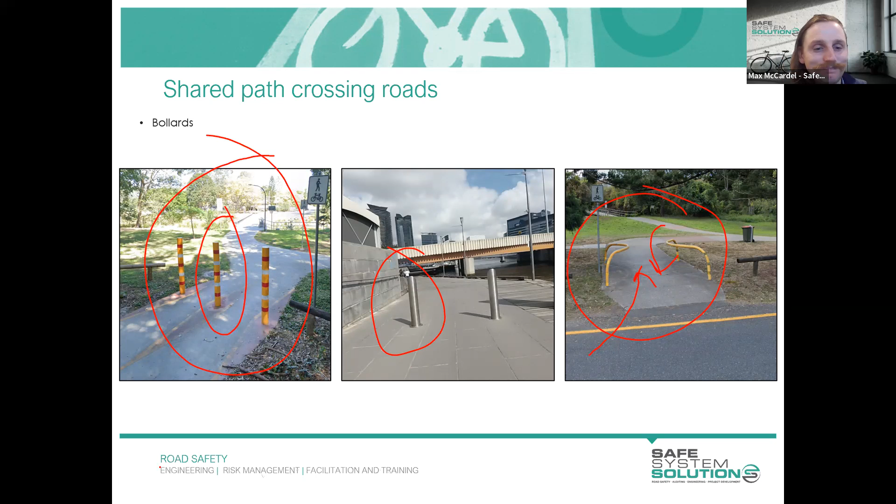A few more bollards and treatments: this chicane treatment is not a bad way to slow down cyclists if that's perceived as important as they're approaching a road environment. That could be particularly relevant if they were approaching a high-speed carriageway, or where they don't have priority crossing. You want to signal they need to slow down and give way - chicane treatments can work quite well.

This last example was in Hobart, using these U-rails or hold rails. Instead of being a hold feature though, it's being used as an actual obstruction in the path.

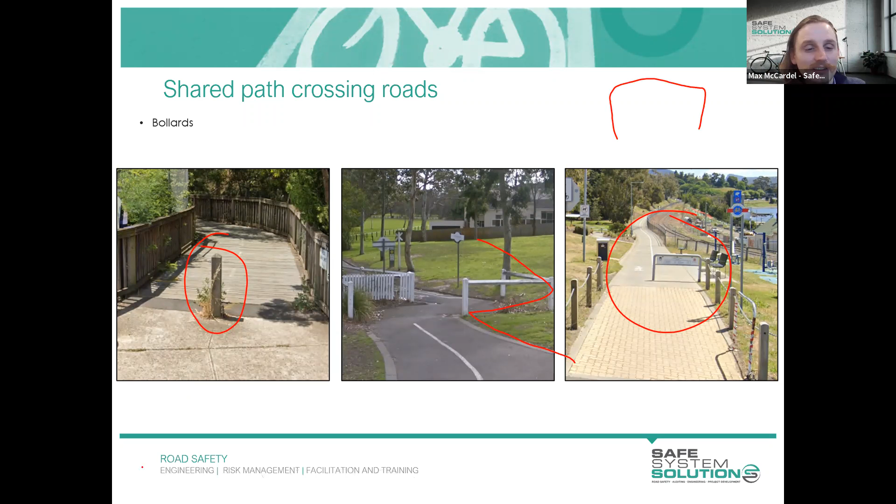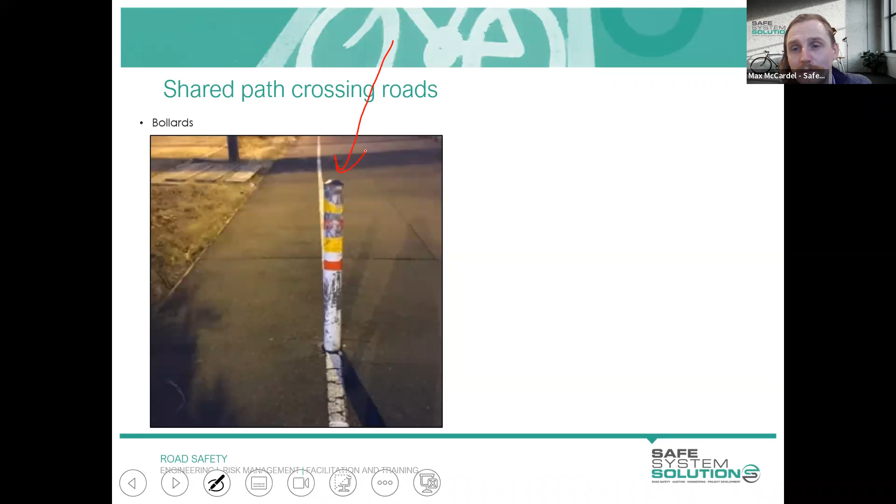I'll quickly chat about this bollard in particular, which as you can see has been struck many, many times. This is on a very popular commuter bike path within Melbourne. This is what it looked like beforehand, and this is what it looked like afterwards - after this fellow collided with the bollard and suffered wrist and facial injuries. While waiting for the ambulance to arrive, two other cyclists hit the same bollard within that half-hour period. I'm not trying to be too dramatic, but if you install bollards, particularly in the middle of the path, they will get struck by cyclists.

So being incredibly aware that they are a hazard - yes, they can be used to deter vehicle movements, but at the same time they are a risk for cyclists. Does the height make them more visible?

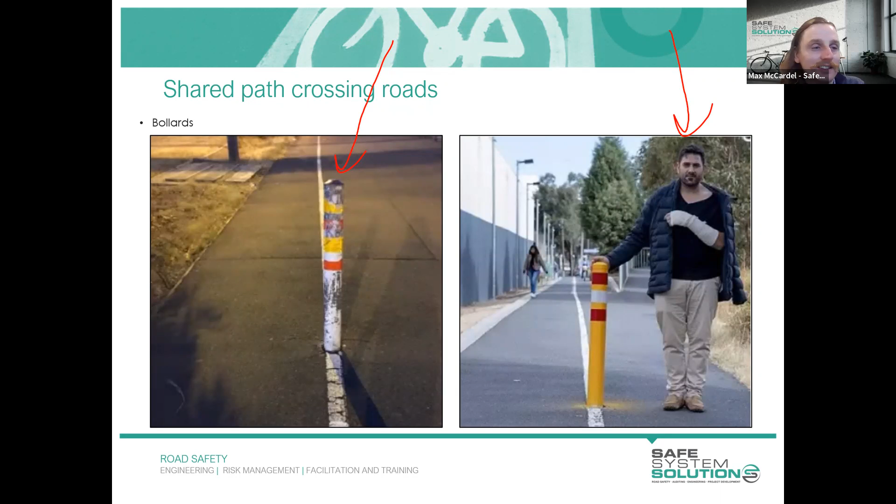Yes, but at the same time, if you raise them up too much, you've got the risk of handlebars snagging there as well. Or I've seen bollards as well, which have little outreach arms to make them more obvious. But what you're doing is reducing the space for an errant cyclist to safely get away from that hazard.

And path lighting, is that a requirement then? It's a good question. I do have an example which I'll hop into in a second, but instead of focusing on the negative, let's look at what could be done to better apply a treatment within these locations.

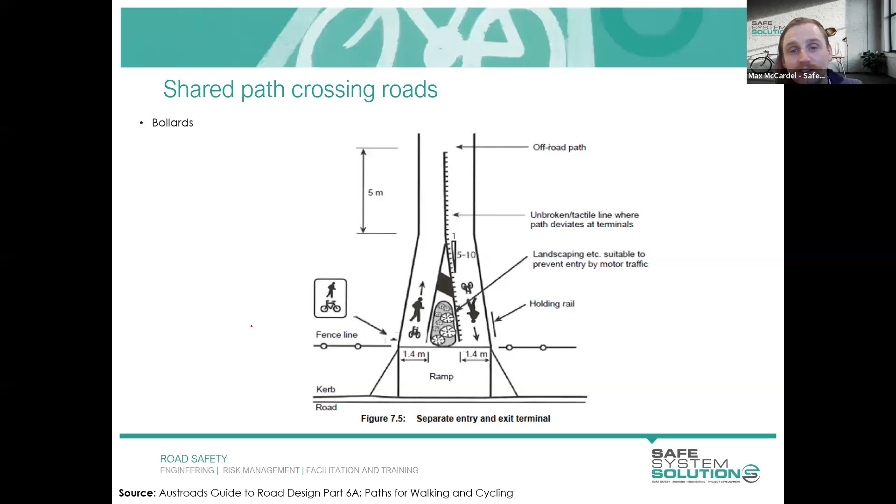A really positive, beautiful one is to use vegetation to create a splitter island, similar to what you'd use on a minor road. The landscaping itself can act as a deterrent, or if really necessary, you can put a bollard in the middle of that vegetation, since it's pretty evident to cyclists they're not going to ride into it. Really big fan of this type of terminal, as it's called, where the shared path ends at a carriageway.

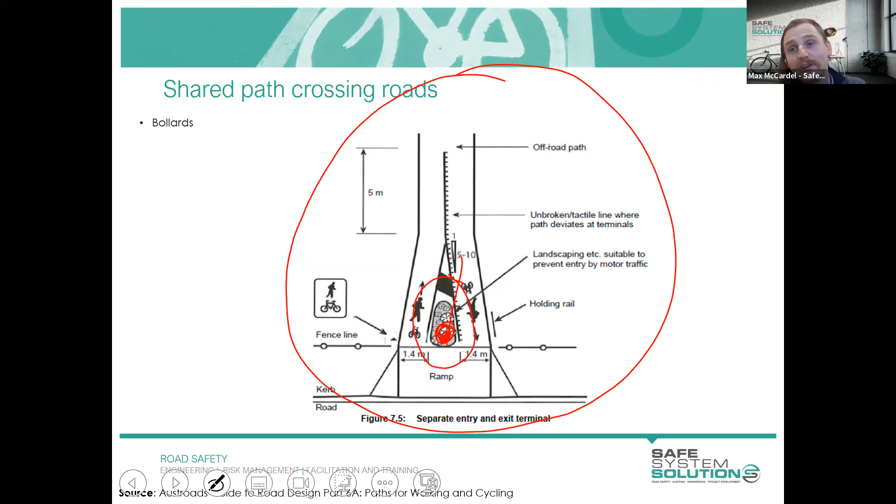Not very common though, which is unfortunate. Here's an example I really like because it's very clear what's going on. It's unlikely cyclists will ride into those bollards, and though hard to see, those are actually little solar lights, so they're illuminated at night. In low light conditions you'll still be able to see them, which addresses the path lighting requirement raised earlier.

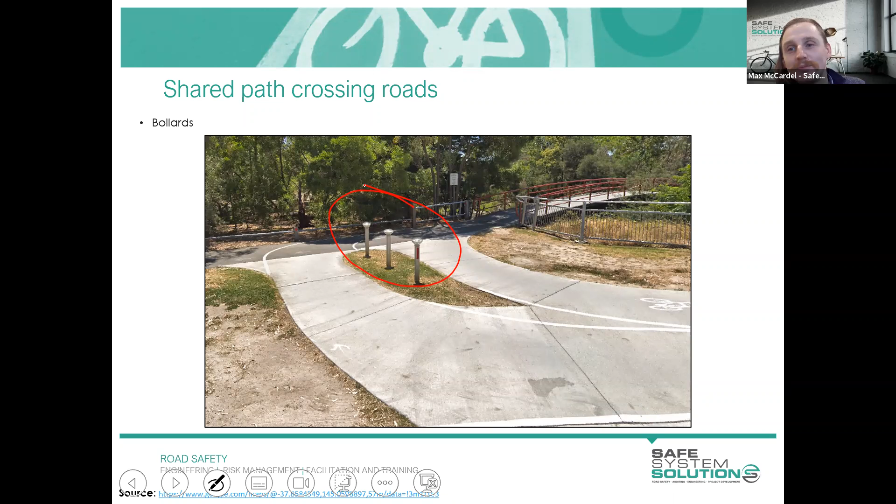In terms of lighting, not just at hazard locations but throughout the path, you can flick through AS 1158 for the actual specifications, because there are requirements, but generally shared paths are quite poorly lit. Even very commonly used, heavily used paths don't have great lighting. Maybe at intersections with the general road network, but I can't say they're commonly lit all through the mid-block.

There's an exception I can think of on the Upfield bike path we were just talking about before. It's adjacent to a rail corridor, and they've used a fence to demarcate the edge of the shared path from where the rail corridor starts. Within that fence, in the top rail, they have little lights hanging on the underside that are completely hidden during the day—you'd have no idea they're there. But during low light conditions, they light up and cast light straight onto the shared path.

So it's not like typical street lighting columns using mast arms or outreach arms or anything like that. It's actually using an existing fencing system and installing lights on the underside of that. But it's a whole different world getting into the lighting conversation, so I might leave it there for now, but happy to expand on that if you're interested.

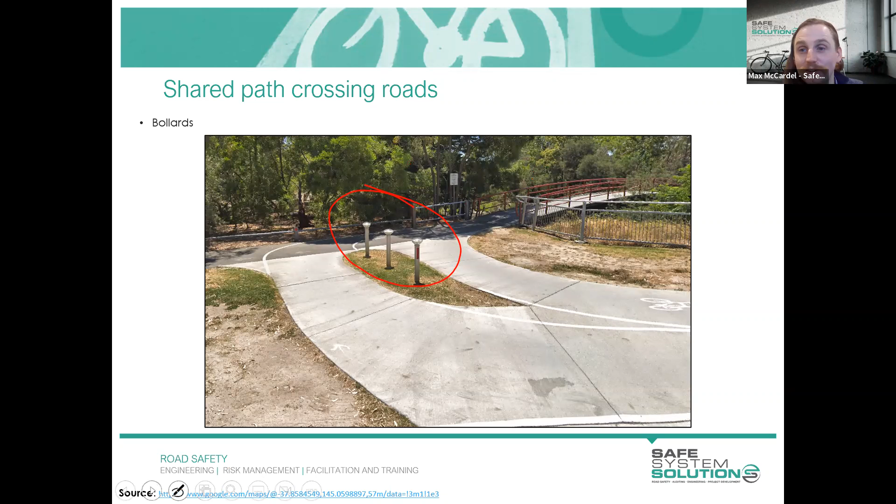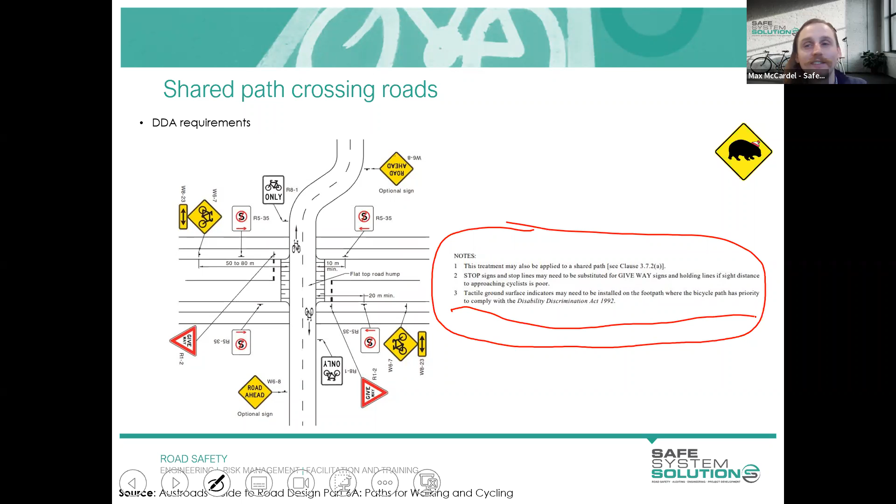Shared paths crossing shared paths. I've got a little photo game here to play, Ken, and I might have to just get stuck through these next slides, and I'm happy to take on any questions for the next module, if that's all right, Ken?

Yeah, that's fine. Yeah, no dramas.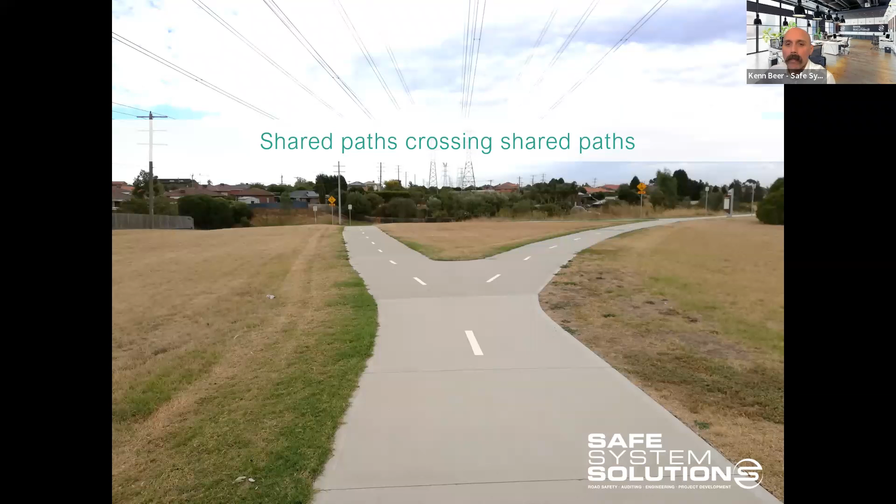So this is a shared path crossing a shared path, and we can see here we have a very confused cyclist. I'd like to ask the group—I'll get rid of the cyclist and move that away—what do you think is wrong with this photo? What's drawing your attention?

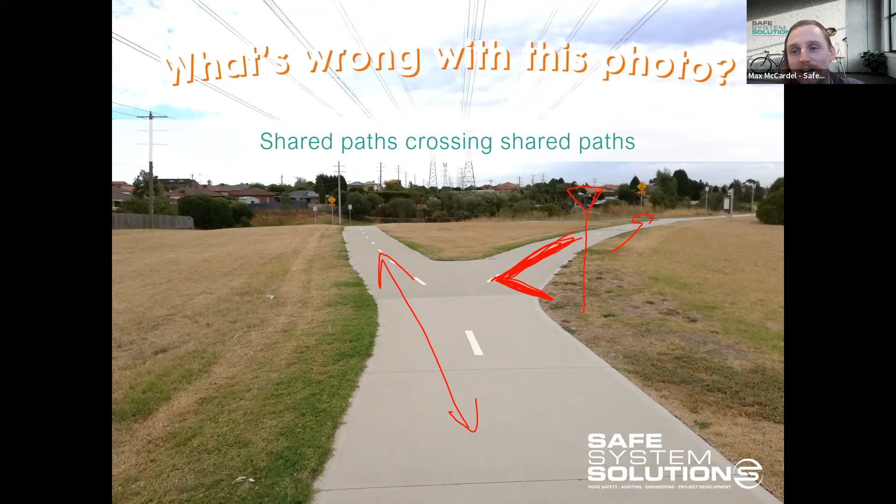In saying that, I came across a Y intersection last week in Moreland City Council, just around the corner from the office. So they still exist, and there was no priority. There you go.

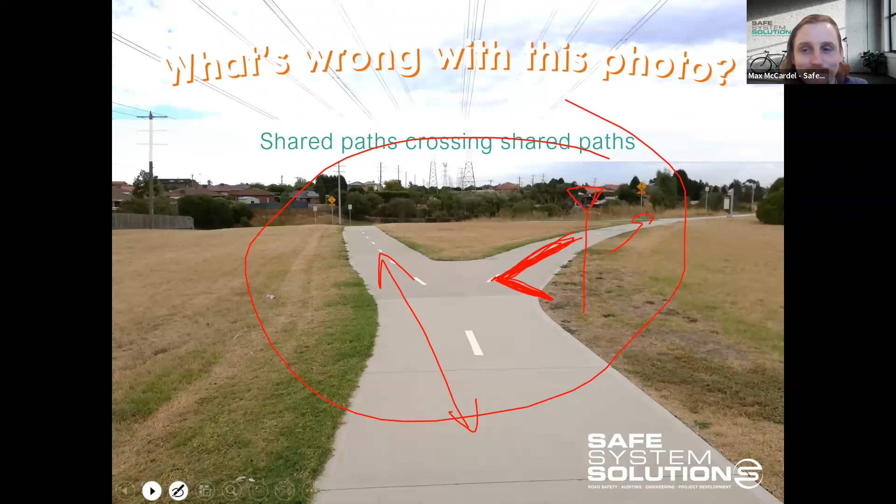Loved also the mention of wayfinding signage. In fact, it's such an important issue that Austroads have written an entire report discussing bicycle wayfinding - in other words, where does this path go and am I on the right path. Across Australia we have different ways of doing it. There's not one national guidance document applicable to all of our jurisdictions.

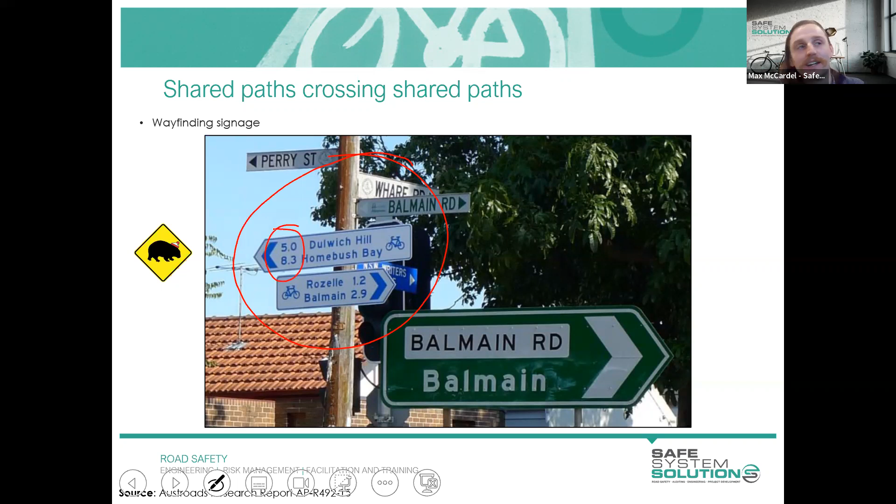So I'd recommend making sure you're referencing what's relevant to your particular jurisdiction prior to looking at any of this information. But long story short, generally what's provided is a little bicycle symbol, colors that are different to surrounding signs just to indicate it's for bikes, and things like distances or how long in minutes it will take to get there. What I really like in international jurisdictions is they commonly use route numbers.

You can see that one there is in Copenhagen, and this one over here is in Switzerland. You can see route number 2, route number 6, route number 5, route number 3, etc. So as a path user, if you were going to this area for the first time, you can have a quick look at the map and know, okay, route number 3 goes from the museum to the train station. I just stay on route number 3 and that's me sorted. It's also color coordinated as well, which is very handy. So I tend to prefer that as a way to communicate that.

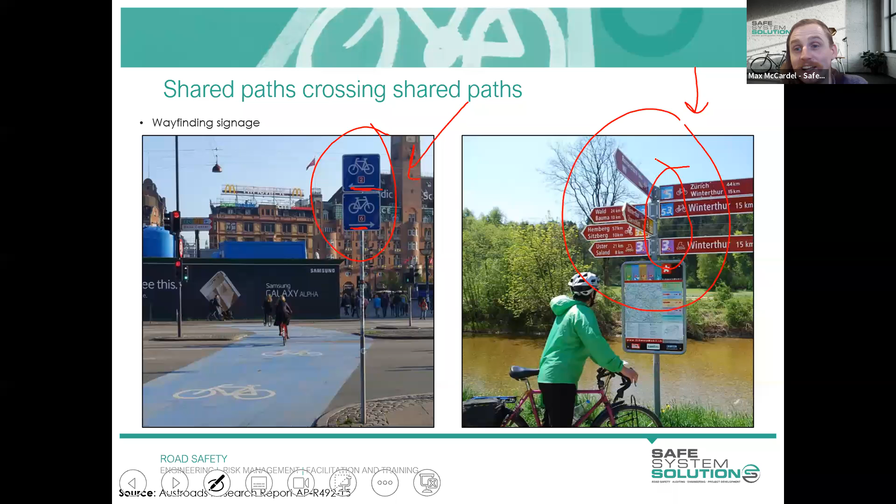But as I mentioned, we don't have national consistency on how to apply these things. So I'd really recommend, if you are within this space, making sure it's at least consistent within your route, because you don't want things changing from the start of an alignment to the end of the alignment. If you're looking at the entire corridor, just keep it consistent with how things have been signed throughout, particularly relevant to things like rail trails that go on for tens of kilometers.

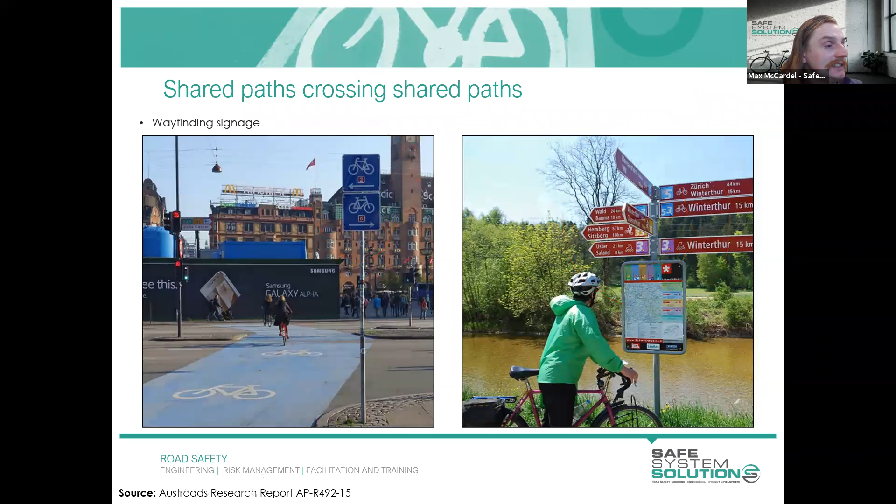Last thing I wanted to mention is just where shared paths cross over with really dense pedestrian areas. A more minor type of treatment is installing pavement markings as a reminder that there's pedestrians in this area. This might have some effect on cyclists, but it's likely to be negligible.

This example is actually in Western Australia, outside a train station in Perth, and they've installed what looks like a typical road intersection. Basically, they've got splitter islands, coloured pavement, curb and channel - lots of things going on here to show that there's going to be pedestrians in this area. So cyclists, you need to slow down and give way.

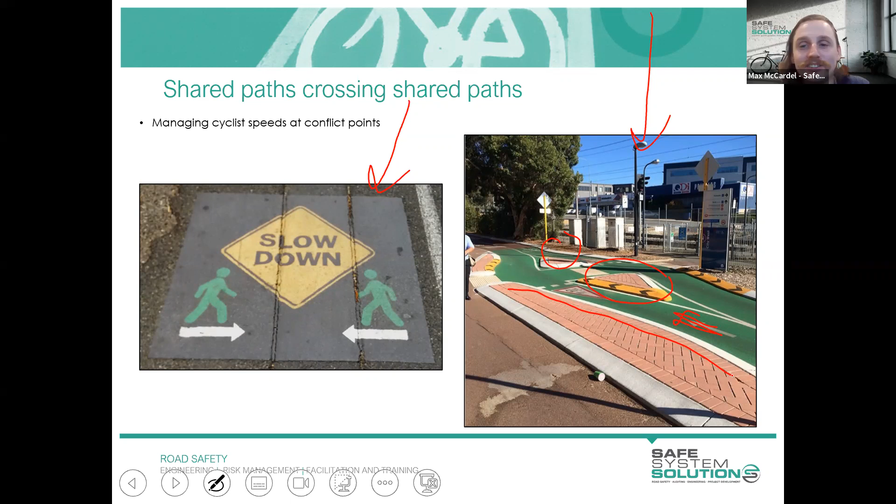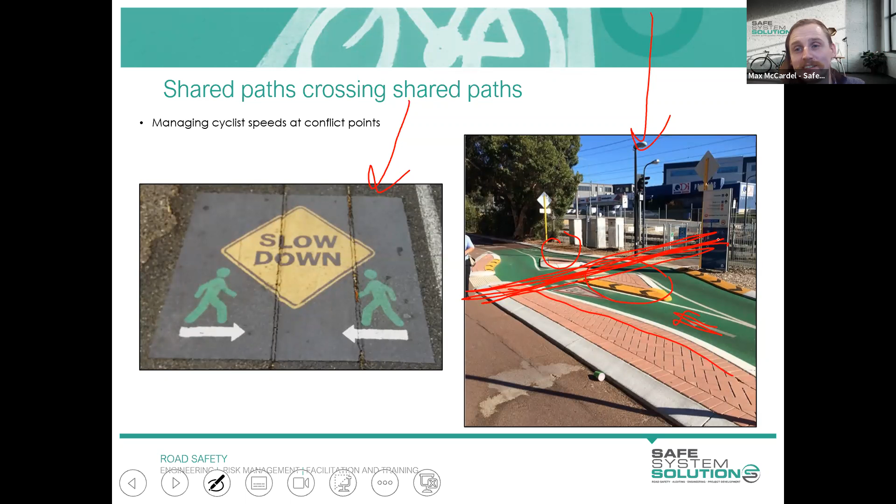And because it's outside the train station, there's lots of pedestrians that cross over in this direction, and giving them priority. Another good treatment that could have been used in this site is providing a raised crossing point for pedestrians here, similar to what we do with vehicles, forcing them to slow down. You can also do that for cyclists as well. So if you had raised that whole crossing up and said give way to pedestrians, that's just another way that particular site could have been treated.